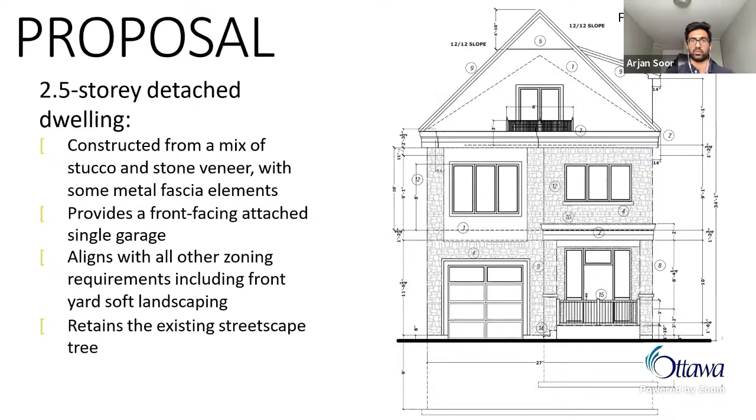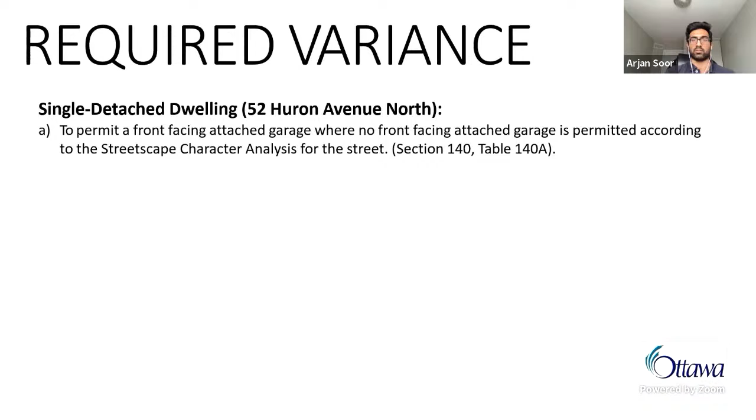If we could move to slide 6, please, just for the sake of time. So the proposed development is to construct a 2.5-story detached dwelling with a front-facing attached garage. The home is designed to align with all other zoning requirements, including front yard soft landscaping, and retains the existing streetscape tree on the site. One variance is requested to permit a front-facing attached garage, where no front-facing attached garage is permitted according to the streetscape character analysis for the street.

So I'll now move into a discussion of the four tests, beginning with whether the variance is minor. The variance is considered minor, as the proposed garage will not alter the future dominant streetscape character of Huron Avenue, even as there are many other front-facing attached garages nearby in the neighborhood that were just outside of the SCA scope.

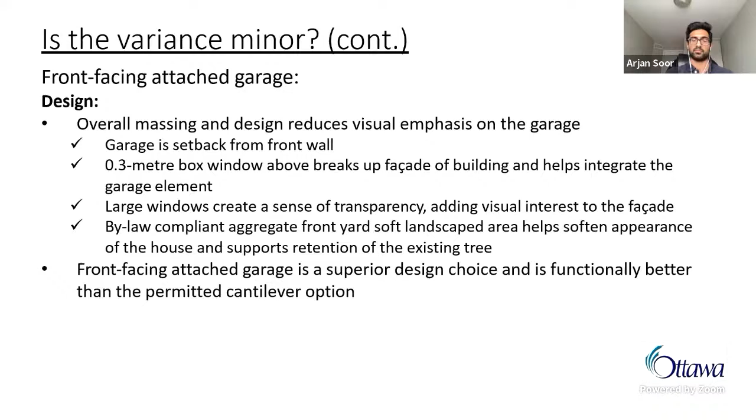This is a side-by-side comparison that shows the differences between the two designs. As you see, the garage option is a more symmetrical and well-proportioned design. It integrates better into the overall facade and provides vehicle enclosure, which helps to secure a parked vehicle and ensures that a vehicle is not visible in front of the home.

The garage also provides functional benefits unrelated to parking, including the ability to securely store household items, bikes, and the like, and to store refuse containers in a manner that does not impact the streetscape. This option also allows for safe and efficient electric vehicle charging and is supported by neighboring residents.

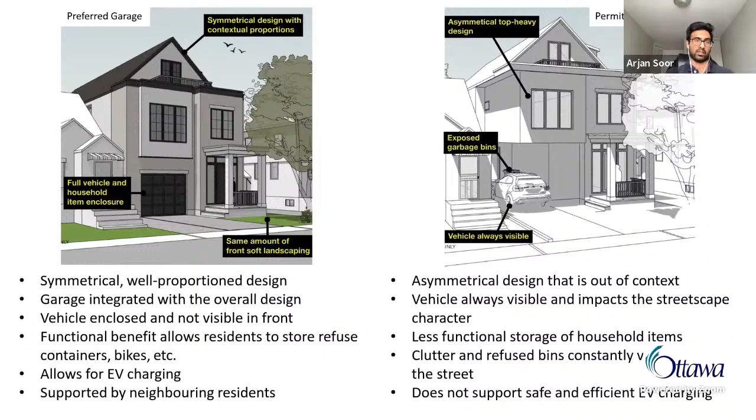The map below shows the consultation conducted by the property owners of this application. They spoke to 34 of their neighbors, of which 14 provided verbal support. Notably, the two abutting neighbors and the ones across the street at 49 and 53 Huron Avenue, all of whom would be most likely to be impacted by the development, indicated that they support the proposed development with the front-facing attached garage. Furthermore, two written letters of support were received, including one from a neighbor on the same street at 80 Huron Avenue and another on neighboring Caroline Avenue at 65 Caroline Avenue.

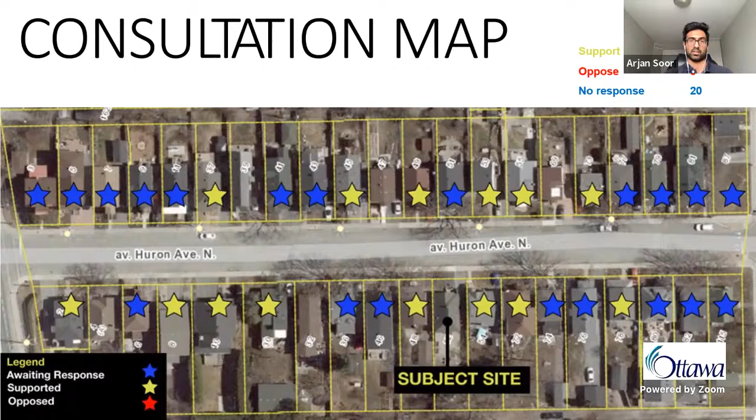So based on these reasons, the variance should be considered minor.

The variance also meets the intent of the official plan, which is to accommodate a full range of low-rise dwelling types within the general urban area and within low-rise residential areas in the secondary plan. It supports the continued residential use of the lot, provides a contextual ground-oriented dwelling form with similar massing to surrounding homes, and results in an attractively designed home that positively contributes to the streetscape.

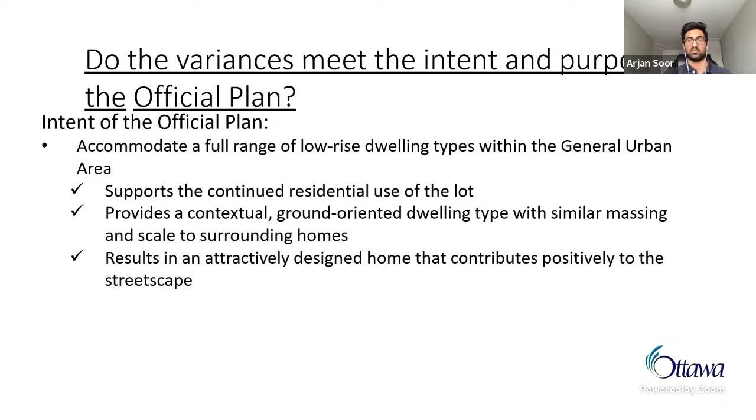The variance also meets the intent of the zoning bylaw. The intent of the streetscape character analysis provision is to ensure that new development demonstrates good urban design that does not adversely impact the streetscape. The original basis of the SCA process was to prevent badly designed snout garages that were out of context with the streetscape. The intent is not to prohibit the provision of garages and does not relate to parking, which is permitted here. It specifically relates to design.

This intent is met as the garage is designed to integrate into the overall facade of the building with a lot of the design elements that I talked about. The garage element option is therefore closer to the intent of the bylaw than the cantilever option, in addition to being functionally and aesthetically superior.

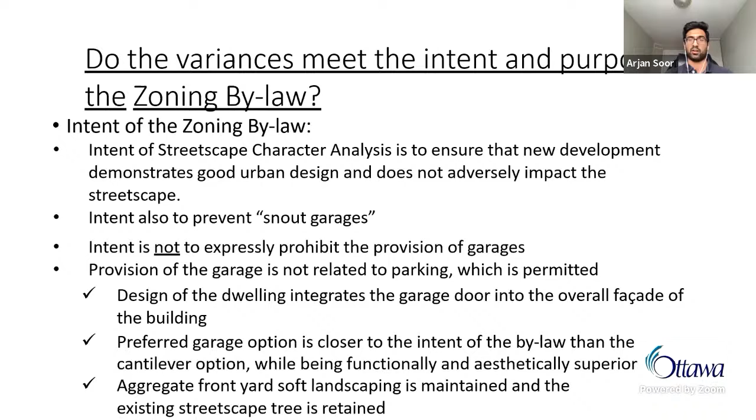Finally, if I may be permitted to continue a little bit more, we're almost done. The required aggregate front yard soft landscape area and the streetscape tree are retained, which further meets the zoning intent.

Finally, the variance is suitable and desirable as it results in a new detached dwelling through infill development and maintains residential use of the property. It also better supports the needs of the current homeowners and their family and aligns with the PPS, official plan, and zoning bylaw.

Based on this, it is the opinion of QLand Planning and Design that the proposed minor variance constitutes good land use planning.

Before we go into questions and comments, I'd like to pass it over to the property owners, Ed and Sharon Bryant, who should be on the call, and they'd like to say a few words of their own as well. Please proceed.

Thank you, Chair and committee members. We moved to Ottawa from abroad 10 years ago for a better and safer life. Since then, we've really made Ottawa our home, including recently getting our Canadian citizenship. We intend to make Ottawa our home for the rest of our lives, and a big part of that is building our forever home on Huron Avenue.

When we designed the house, we were very conscious of designing a house that fit with the character of the neighborhood, including having a front porch, a pitched roof, a traditional stone facade, and a setback garage. We believe the cantilever option available without a minor variance is hugely inferior and doesn't fit with the existing streetscape. We also made sure the whole house complies with other city bylaws by not reducing the rear, front, or side yard setbacks, and staying within the height restriction for the neighborhood.

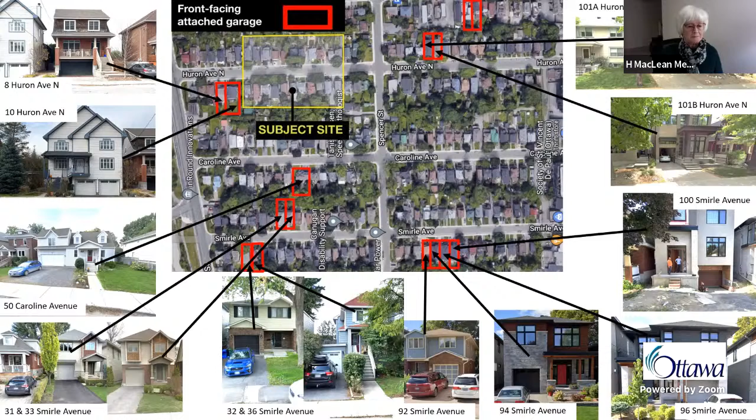Mr. Wildman: Thank you, Chair, and thank you, Ms. MacLean, that was helpful, some additional context for me. I've been sort of on the fence on this one. Anyone who follows this committee knows I don't think I've ever voted in favor of supporting the streetscape character analysis, although on this one I was struggling a little bit. I did see some of the images, and your commentary about the cantilever design not being within context of the area is a little more helpful for me.

My real comment was, could I see a couple more images? I looked at them while you were speaking. I'm comfortable, Mr. Chair, supporting this request — it's in your hands as to whether you wish to go into reserve or not. Thank you very much.

I guess I'm torn on this one as well. The argument that we're so close to the transitway compared to other properties we've had to consider. It's really a stone's throw away in terms of walking distance to public transportation.

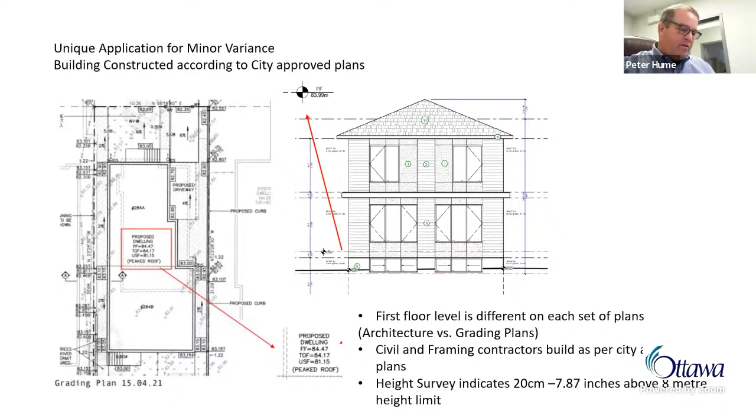We can go to the next slide to give you some planning context. This is Dover Court Avenue. 284 is to the south in the middle, just below the M in mature, and it has an 8-meter height limit along that stretch. Interestingly, the other side is an R3R zone with a height limit of 8.5 meters, which indicates you're not going to see a large variation when you look at the streetscape. We've given you a picture directly across the street where you see a building of similar stature to 284 Dover Court.

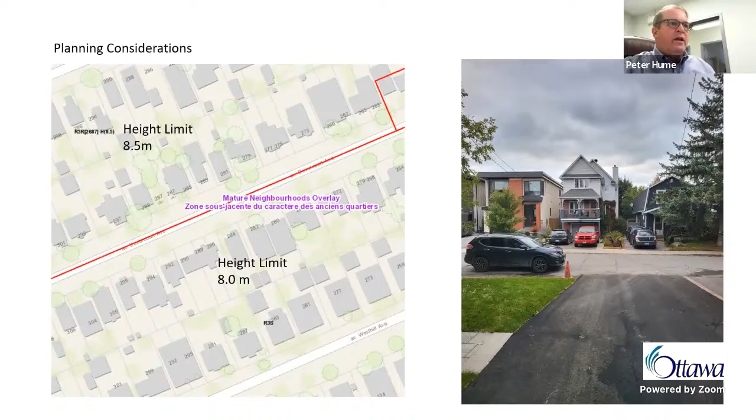These are the images to the west: two semis and a single flat roof. We didn't do a height calculation, but we would assume these would be about 8 meters in height. Typically, flat roofs are used to achieve a maximum building form under the height limit. The two pictures next to it are the neighbors to the west, which is a small, story-and-a-half property.

So if you go to the next slide, the first test of the Planning Act is whether the variance is minor. Adjusting the roof line wouldn't noticeably change the building in its context with the streetscape, because the first floor windows and the second floor windows would be in relatively the same position. So it's not going to create increased impacts on the streetscape or neighboring properties. In that context, it's relatively minor.

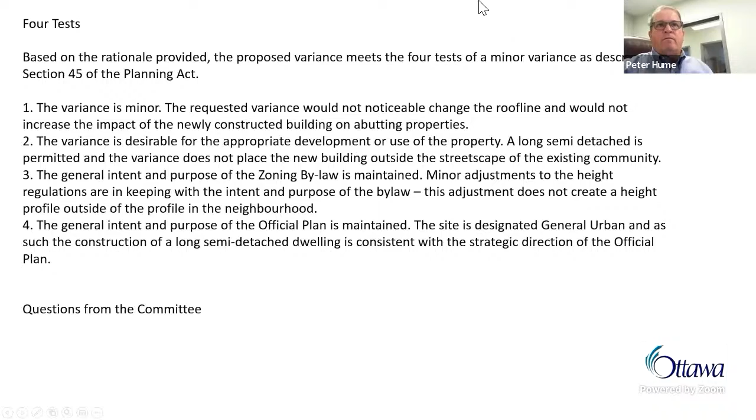Thank you, Mr. Hume. Ms. Linker, I'll ask you the same question I asked Mr. Hume at the beginning of his presentation: how did this happen?

Thank you, Mr. Chair. I have the same understanding as Mr. Hume, that this was reviewed at the building permit stage, and from my understanding, the discrepancy between the two plans—the grading plan and the elevations—wasn't caught during that review period, and it was approved for a building permit.

Okay, Mr. Wildman, do you have any comments regarding this? Well, I'm glad I'm still not the manager responsible for this, but that would be my first comment. I guess I can see two errors were made here. Two consultants were working on two sets of different drawings, and something was missed. Then when it gets in for internal review, the grading reviewer looks at his plan, and the building reviewer looks at their plan, and somewhere that should have probably been cross-referenced didn't happen.

So I think there's enough blame to go around, and I think we're really talking about how do we deal with this now. I think it's safe to say the building will not be coming down, so how do we do something appropriate here? Under the circumstances, I'm always concerned, and I think Mr. Hume, given his experience in planning, would appreciate this too, about setting a perception that it's okay to build and then come in for an exemption later. That's certainly not what we would want to do.

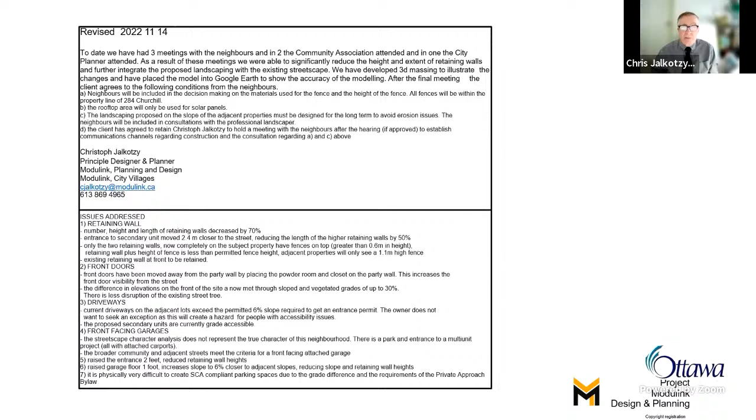This illustrates the various elevations and the elevational changes we've made. The length of the retaining walls and the distance to the doors at the rear and the grades have significantly changed. They're up by 2 feet to the back entrances and the front entrance, and up 1 foot for the garage door entrance—that's 0.3 meters and 0.6 meters.

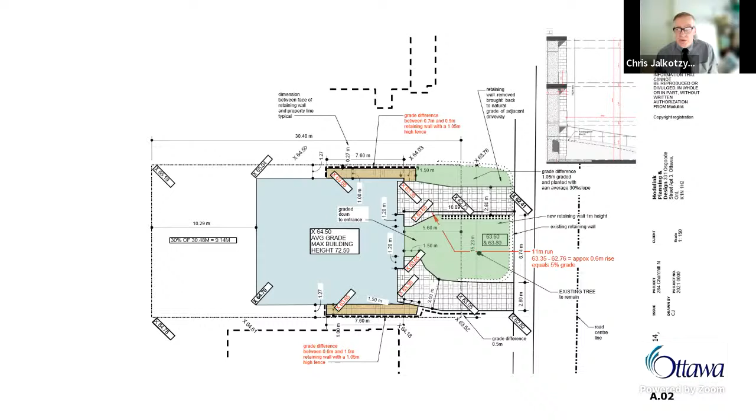Next slide, please. This illustrates where these changes have taken place in the heights and the variances we've made, both inside the building and on the outside.

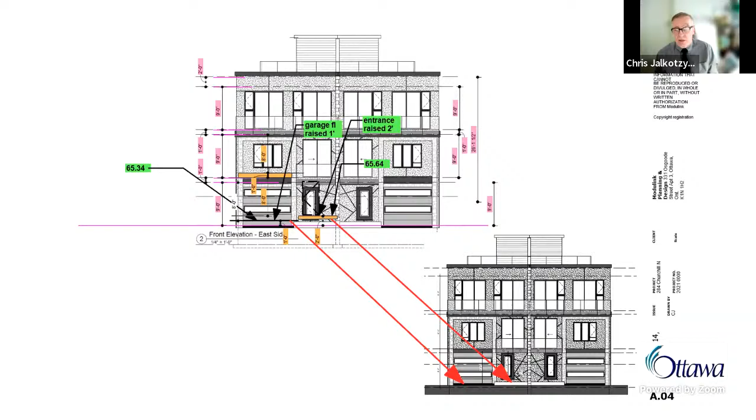Next slide, please. Again, illustrating where these changes have been made to raise the building to a higher height in terms of the floor areas at the lower level. The overall height of the building has not changed—it has stayed identical.

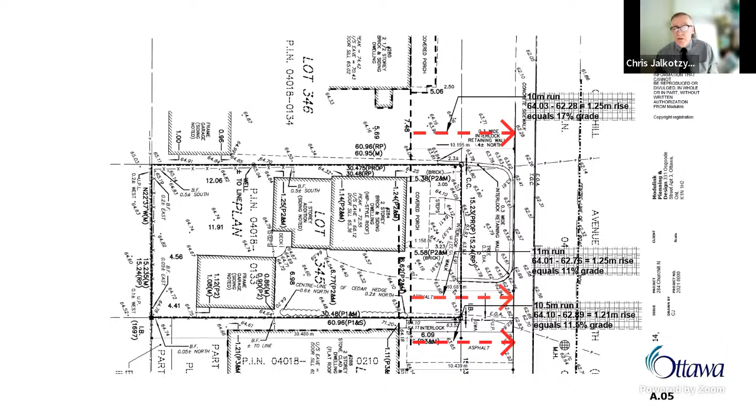Next slide, please. This illustrates the existing slopes of the driveways on the adjacent property and at the existing property. All of these slopes exceed what's permitted under the private approach bylaw.

Next slide, please. This illustrates that we're staying within the height limit as required for the building. Next slide, please.

Here's where we've done the 3D modeling to indicate how the slopes can be addressed. We did this using the geotechnical information from the survey, so these elevations reflect that information.

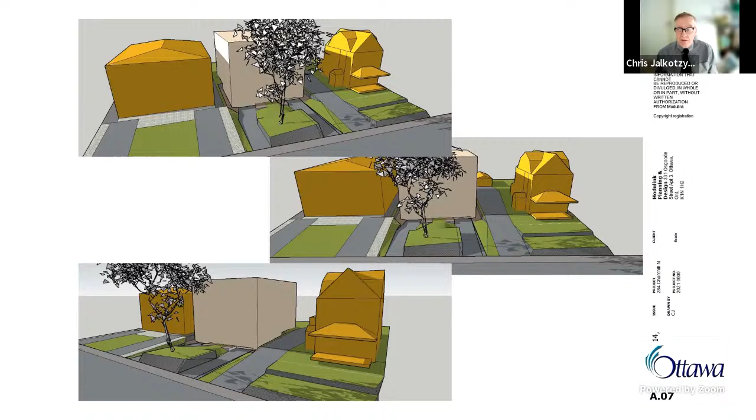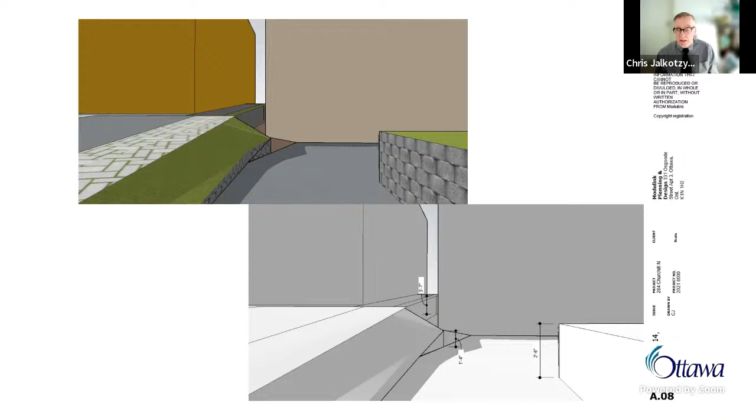Next slide, please. Here you can see the driveway coming in and the grade. The two shots are the same; one is just rendered a little bit differently. This shows the height of the retaining walls, both existing and where we're putting in the retaining walls and the sloped landscaping. Next slide, please—same on the south side of the property.

Next slide, please. This shows that we took the model and put it into Google Earth, which is actually quite interesting because we geolocate all of our projects, both for sun shadowing studies and other things. You can see that the model fits very closely into the existing buildings, so the actual locations of the buildings on the north and south of the property are clearly correctly modeled. Next slide, please.

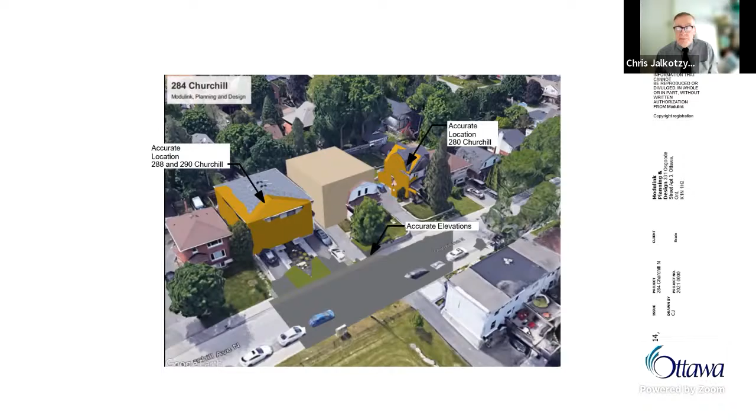This is about the front yard garages permission minor variance. The neighborhood here, other than Churchill in this location, predominantly complies with the SCA requirement that would permit a front-facing garage in this area of the neighborhood.

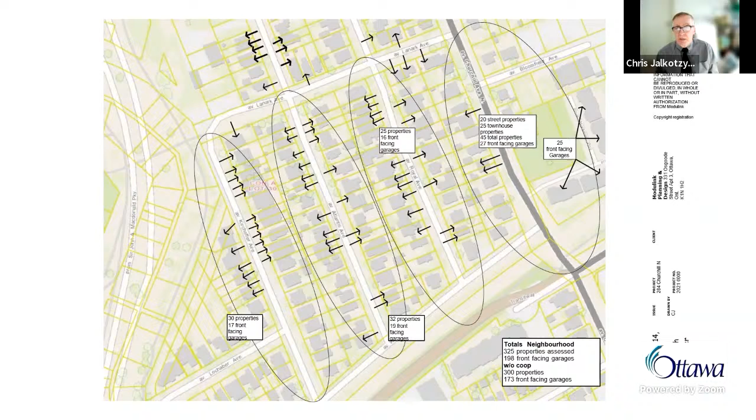Next slide, please—and on the north side of the property. I should say I incorrectly noted that the co-op housing project to the east of the property has garages. It doesn't have garages, they are all carports. I apologize for that, so they aren't included in the SCA.

Had that co-op housing project not been in that location, and had we had a pattern of development closer to what's in the rest of the neighborhood in terms of front-facing garages or carports, then this property would comply fully with the SCA.

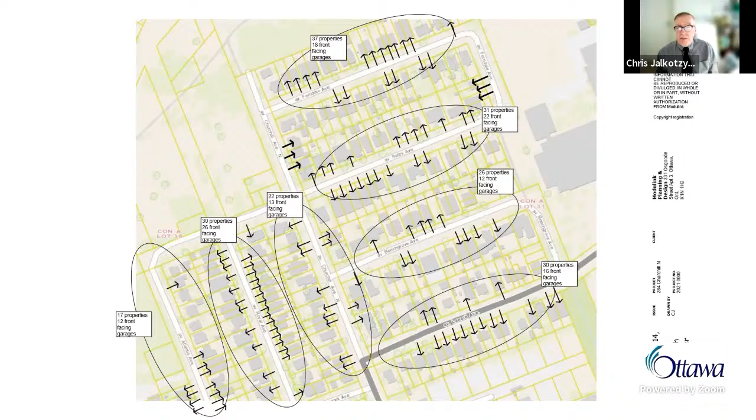Next slide, please. This shows the pattern of development. We've got numerous properties in the neighborhood of similar character in terms of severing into two properties as a semi-detached building.

So it's very, very consistent. Obviously, the property to the south is already a semi-detached with front-facing garages as well. Next slide, please.

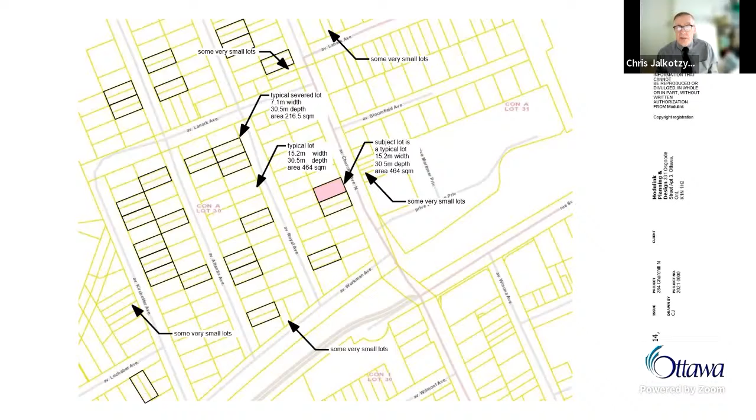The way we've done the grading for natural grading, as well as the commitment on the part of the owner to work with the neighbors, both for fencing and for landscaping.

The owner has made a commitment and agreed that, if the committee does approve these variances, I will manage a meeting between the neighbors, the community, and the developer to set out the method that communications will take place, and I will monitor that those communications take place.

I know there's been some difficulty in the early stages of this project, but I think this lends a little bit of security to the neighbors that the owner will follow through with the commitments he's making as part of this.

The general intent of the purpose of the bylaw is maintained, to permit semi-detached dwellings—the intent for new infill property in the neighborhood. The intent of the official plan is also maintained, and the Planning Act supports intensification in the general residential areas.

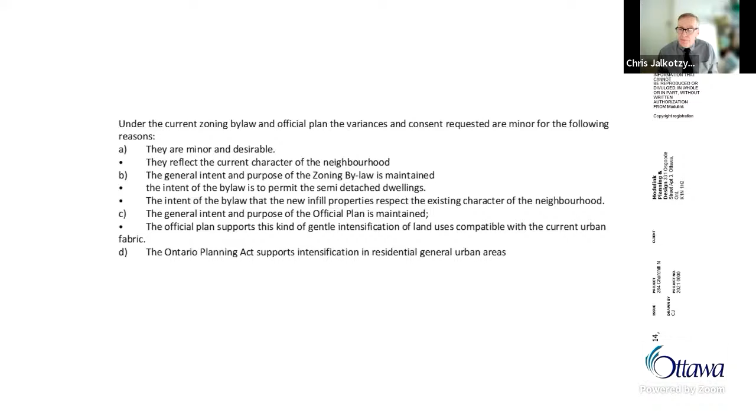Any questions from the panel regarding this application?

Okay, we also have on the speakers list Ms. Lasso from the Westboro Beach Community Association. Are you there? Yes, I am, Mr. Chair. Thank you, and your address for the record please. 266 Ferndale Avenue. All right, thank you, please proceed.

Yes, we've been involved in communications with the agent for the developer, and there's been many discussions. At this point we will not oppose the variances requested, and we leave it in the very capable hands of the committee to make the final decisions. Just to note, if this development does go through we will keep a very careful eye on this, and if required we will make other interventions as we go forward. But at this point things are looking okay.

All right, thank you Ms. Lasso. And Mr. Trong, I believe at 288 Churchill Avenue. Yes, hi Mr. Chair. Please proceed. Yeah, so the developer has made some very positive changes to address our previous concern.

My remaining concerns are only the following. First is the front-facing garage. I know the previous decision made by the committee was that the front-facing garage would not comply with the streetscape, so we'll let the committee decide whether they would agree to that at this point.